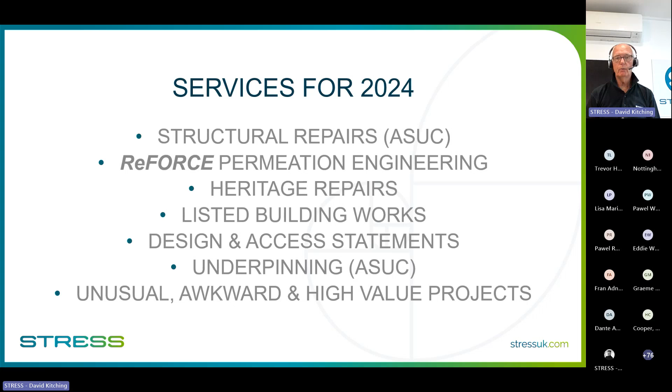Within structural repairs, you've got masonry reinforcement, crack bonding, the cosmetic refurbishment that goes along with that, stone repairs, because obviously dealing with a lot of old listed buildings, we have to do that.

What I would say is that working with listed buildings is really quite specialist, and if you haven't done it before, it's easy to fall foul of the local authority conservation officer, and dealing with them needs to be done carefully. They're very intelligent people, they know exactly what it is that they require, they know what the rules are and the laws. And if you transgress those, someone goes to jail, or certainly there'll be fines. So we can help steer you through that little lot.

So let's crack on, if you pardon the pun. Now, I think everybody can see that that is a pretty standard, quite substantial fracture in a building, and this is a sort of thing that is very common due to subsidence, thermal movement, sometimes certainly impact, as we'll see here. Find out what your cause is, and obviously try and make sure that whatever's causing it is rectified before you then do the structural repair.

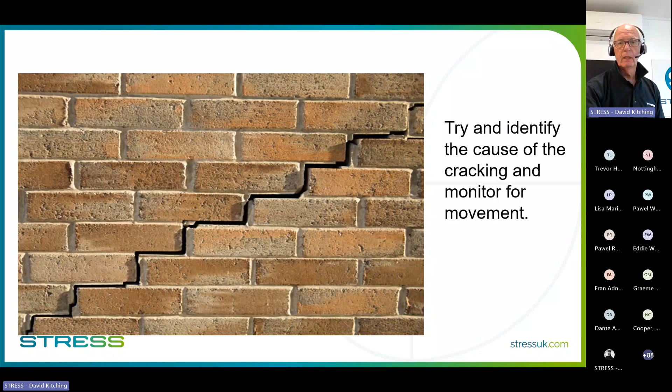So in this case, we can see that the cause of the cracking here was some enthusiastic parking, which, funnily enough, I put up for two reasons. One is that it's quite amusing, I can't believe somebody didn't get hurt, which is obviously sad. But we actually get involved in pulling cars out of buildings, or vehicles out of buildings, more often than you would warrant.

And insurers ask us to do that because they know we can make the building safe to be able to pull the car out, because in that particular instance, you don't know what part of the building is now sitting on the car. So just to pull it out, you'd get progressive collapse potentially.

So we look at the structure overall, put in whatever necessary temporary works are required, which includes quite often masonry reinforcement to spread loads so that actually you can safely extract the car.

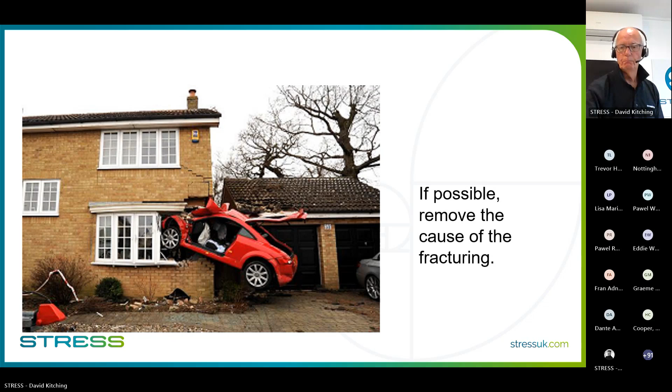Some of the considerations for an effective structural repair: how much disturbance are you going to have to do to this building? Try and keep it to a minimum, because the aesthetics are everything. Because if it looks like it's got an elastoplast on it when you've finished, it's not what you want, is it? If it was your property, you wouldn't want to see all the scars of the repair works. You want to try and match them in, get the color matching going, do as little as is necessary. That's one of the things that's really important here.

Find out what type of repair is going to be appropriate, and obviously then record that. If it's a listed building specifically, you have to record everything you do to that property.

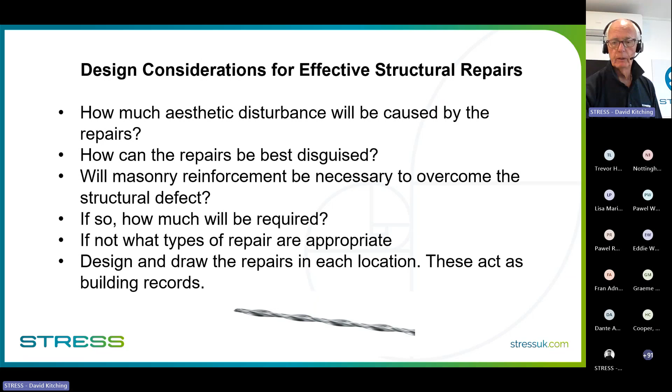So we're going to go on and look at masonry reinforcements. For those of you who don't know, or haven't seen this, I'm sure most people will have done. It's a method of installing reinforcement into masonry to do two things: to structurally rebond it, and to distribute stresses in the future. Quite often buildings are subject to differential movement through thermal effects, through drying out of clays, swellings of clays, all sorts of bits and pieces, or where you've got a building that's been extended and the extension is on a slightly different footing to the main building, then you can potentially get movement between the two. Masonry reinforcement spreads those stresses and usually prevents recurrence of cracking in brickwork.

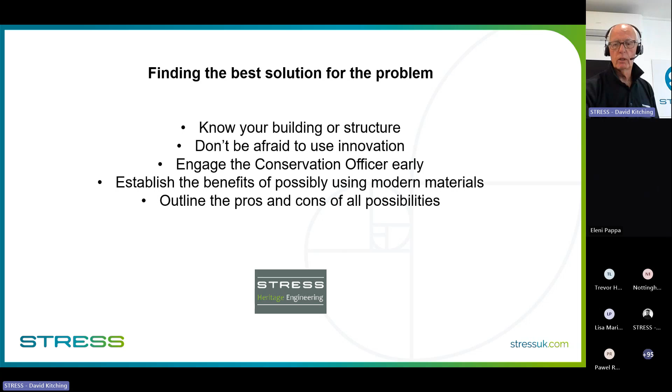So one of the things we're talking about is scarring buildings. Here's something very simple: a little semi-detached house, very typical. There's been settlement of that left-hand flank wall. And the reason was, when we did the site investigation, in fact, those drain pipes never went into a drain. So they've been just draining gently into what is actually, on this particular site, mostly sand and gravel.

So that flank wall has settled with time a little bit, and you get that classic crack between two weak points in the building, which are the windows, obviously. That's fine, no problem at all.

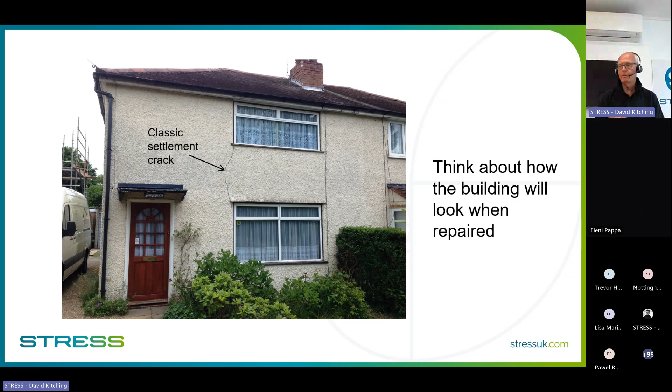Easy. If that was brickwork, you just literally go into the bed joints of the brickwork, make good, resin inject the crack, everything's fine. If you take a Hilti wall chaser to that rough cast render, no matter how carefully you repair that, it will always be visible in some light or other at some angle of the sun.

So you're never going to hide the fact that that has been structurally repaired. So what do you do? Simple, you go inside. Yes, you're going to disturb the decorations inside, but most house owners will thank you for not advertising the fact that their house has been structurally repaired.

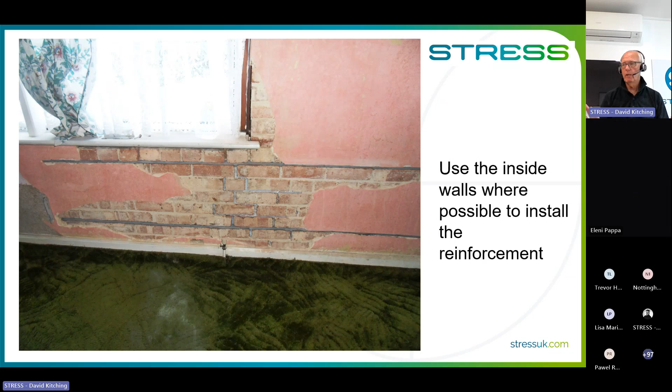So you come inside, you put the HeliBar into the brickwork, you resin inject the crack, as you can see. This was solid brickwork, but it still works for cavity construction in exactly the same way. So you put your heli beam in, then you tie the two inner and outer leaves together with pins, replaster, redecorate. You'll never know that the crack has been repaired and reinforced.

And then what you do when you go outside is don't disturb that rough cast render. So you do some very careful injection work with tiny little 10mm holes along the line of the crack, and then just gently piece in similar sized bits of aggregate, and sponge it in with some cement paste, with a little bit of SBR in it. And when you paint it, it's not invisible, but it's actually quite difficult to see what's there.

So this is the art of structural repair.

So let's go on to listed buildings. This is, or was, an old pub in Haddenham, Buckinghamshire, and it was bought by a client, taken out of use as a pub. He wanted to actually just flip it.

But he took on what probably any of you who deal with listed buildings will know is a bit of a nightmare, that you come across stuff that you never knew was there. So this was something that happened there. All the old barn on the outside was stripped off, and it exposed this gable end of the main pub with the chimney in it.

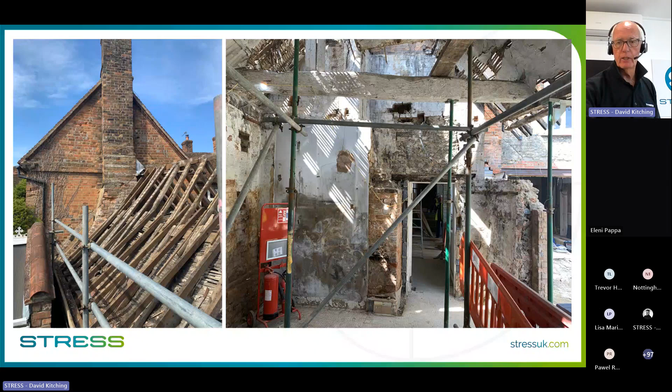And as you will see in a minute, you can see the sort of general state of the place. Not great. When you look up that gable wall, you see holes, cracks in the chimney, probably through chimney fires. Everybody realized at the end of the day that that whole end gable was live.

So we were brought in by the main contractor, who we do quite a lot of work for, and he said, 'Do you think you can save that?' So we looked at it and said, 'Yeah, I think we can. It's going to need a fair amount of masonry reinforcement, but I think we understand what's going wrong, and we can save it,' which was music to the conservation officers' ears.

They almost refused for it to be taken down and rebuilt, which the main contractor wanted to do. The client didn't want to do it because it's going to cost him an awful lot of money. So to try and save this historic brickwork was a good thing.

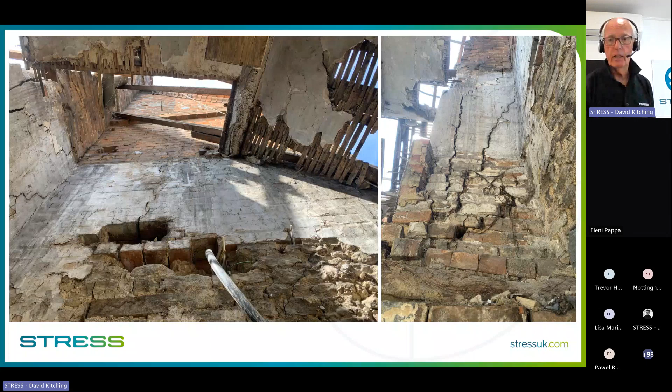So off we went with a scheme. When we started looking around, we took plaster off to see what the substrate was, and as you can see there, that gable wall had at some time in its life been rebuilt, because it's in brick. The rest of the building is in stonework. So that was one thing to take into consideration.

And then we realized when we got into that corner that in fact there was no tie between the gable wall and the flank wall. So another reason why that whole structure was a bit live. So again, one of the things you've got to do is design a bond in there again. So these sorts of things you find out.

You also notice that there's flues in that chimney. You've seen the chimney go up on the outside, so there's bound to be fireplace flues on the inside. Usually with that void there, you get very, very flimsy brickwork, which needs to be stiffened to make that wall work. We'll see that happening in a minute.

Whilst we're there, the main contractor said, 'Look, I've got another problem. I want to increase the size of that opening.' And you can see that opening there with the steel beam over it on the right-hand photo. So we said, yeah, that's absolutely fine.

What we'll do is we'll put some masonry reinforcement in. We'll put a masonry beam into that stonework above that existing opening, and you can reduce the amount of propping you need to do significantly. It makes it an awful lot easier. So in fact, it meant that they could put a new spanning steel in much more easily, threw more load onto the corner, so we underpinned the corner, but generally masonry reinforcement makes things much easier to temporarily prop.

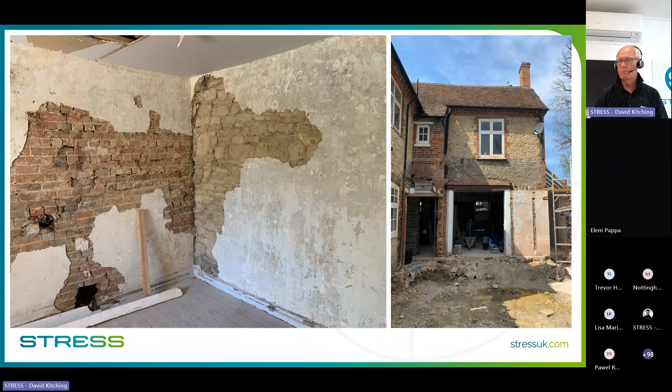So as we said, mark everything down on the drawing. If it's listed, it's going to have to go off for approval, so you need it recorded. Everybody needs to know, including the client, architect, the conservation officer, your guys on site need to know exactly what's going to happen. So you record it, normally on CAD. This was done just on the architect's drawing, as you can see, annotated.

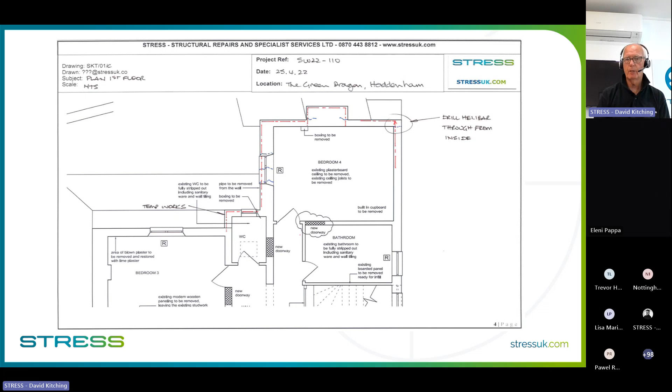One reason I want to show you this is in plan, looking down, top right hand corner there on that gable wall onto the flank wall, there's that discontinuity. Now what we see a lot of in design, and also on some sites, is the repair put forward runs the helibar around the inside of the corners. That doesn't really work, because if the gable wall wanted to move up the page, and you had helibar running around the inside, all it would do is pull the helibar out of the wall sideways. You really want to use the stainless steel bar in tension at all times, so you actually drill through and return the bar on the outside. You can do this almost anywhere. It's a little bit more work, but you get a much more effective repair.

When it comes to the installation, you can see here we've got stonework, fairly regular, but the blocks themselves aren't exactly square like brickwork. They've got slight curves to them, blocks are slightly different sizes, so the bed joint isn't straight. If we ran our chaser straight into that bed joint in a straight line, when you do the repointing, those two lines you see would be straight and all the other pointing would work around the blocks. So you can't do that. You have to hand chase those in, a little bit more work around the blocks, and you'll get a slightly uneven line. When the helibar's put in, as it is there, and repointed, you won't see it.

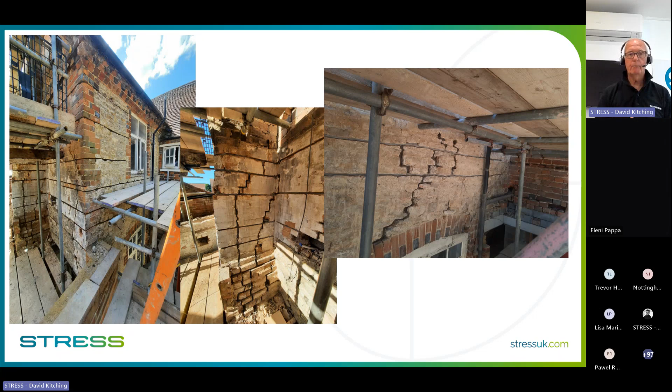It will completely disappear. If you're going into brickwork, you want to follow the bed joint, and the bed joint normally will be straight. Mind you, when you see some of the modern brickwork that goes up, none of it's straight, which is a pet hate of mine. You never see a perp in a straight line. I don't know how people actually get the brickwork passed. Anyway, let's not get onto that.

What I wanted to point out here in that right-hand photo was, if you guys go to site, whether you're familiar with masonry reinforcement or not, you go to site and see it installed - we've seen some horror stories. It's got to be put in right, otherwise there's no point in doing it.

Here you can see just how clean that cut is. We have removed all the mortar. This mortar's normally pretty weak stuff, so if you're going to use it to spread stresses, it's going to have to bond to something. If it's friable, it's not going to distribute any stresses through it. So you remove all the pointing over the depth you need it. Something like this, probably you take out around about 20 to 25 mil of mortar.

You then vacuum it out, you then wash it out, and then you spray a primer in. So then you put the bar in, and then you go in with the polymer modified cementitious grout, and that will bond beautifully to the brickwork. Surround the bar - it's helical bar, so it binds to it incredibly well. When that brickwork tries to move, it will distribute those stresses into the bar and prevent further cracking. So that's why it's really important.

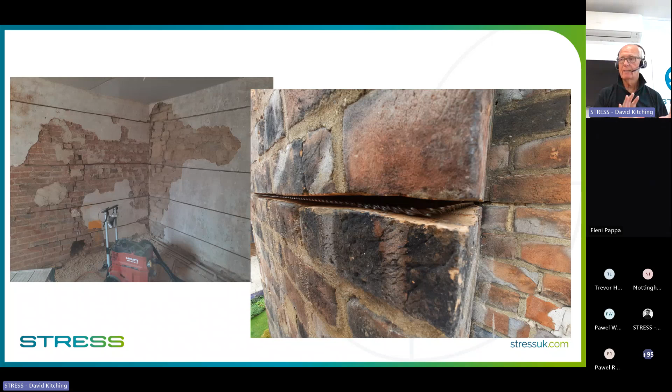Left-hand photo is a photograph of the inside whilst we're actually doing some of the works. This is a mistake here, but I really wanted the guys to put the two bars on the two walls in at different levels, because it looks at the moment like we're going to do exactly what I said not to do, which is run the bar around the corner. Bars on the right hand flank wall, the stone wall, are actually running straight through to the outside and then returned. The bars on the inside of the brickwork on that gable wall are there to stiffen that wall over the chimney openings.

Right, I'm still trying to get a photograph of that job finished, because in fact it was all repointed by somebody else, and I keep meaning to go back and take a photograph of it, and I will do that.

Right, we're going to change tune here a little bit and go on to something right up at the top of the listed building chain of structures, and that's Brighton Royal Pavilion. A good deal of you have probably been there if you've been to Brighton. It's one of those things you probably should do. It's quite an extraordinary monstrosity, really. It's an edifice. It's a wedding cake, really, isn't it? But a fascinating place. And we were asked to come in and solve a problem with the Adelaide balcony.

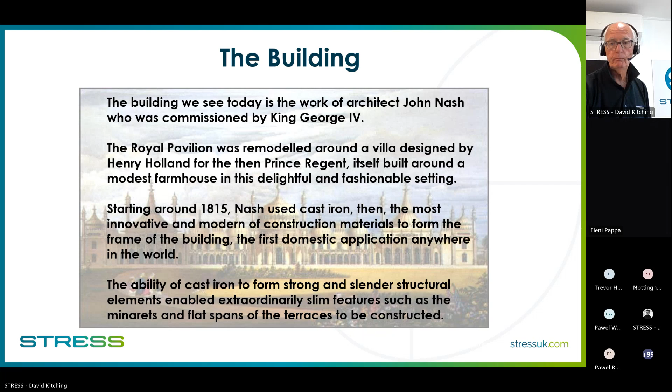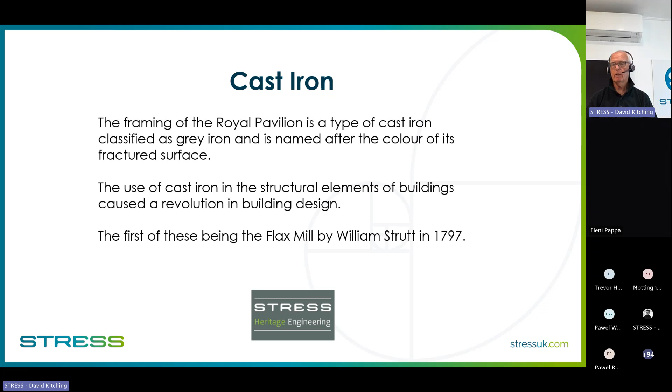He also did this sort of thing in London, which I'm sure you've all been past or into. But it was an engineer called William Strutt, back in the late 1700s, who first used it in a commercial building called the Flax Mill, up in the Peak District. This is still a museum - you can still go and see this building, and you'll see in a minute why he used it. It gave him much bigger openings, a much nicer working environment, and a much stiffer building altogether.

There it is, so that's the Flax Mill. You can go and see that today. Solid floors, jack arches - so brick jack arches that come down into spanning cast iron beams supported with columns. You can see how slender those columns are.

So Nash saw this and thought, wow, if I can turn this into a dwelling, into a palace, it's going to impress the king - which it did.

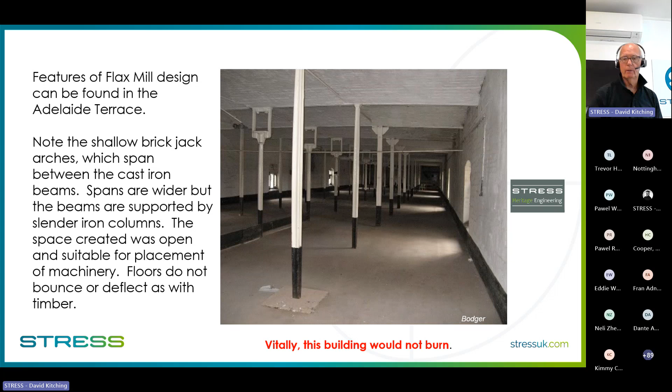However, there's a bit of a problem with cast iron, and that's that it's brittle. I don't know if any of you've taken a sledgehammer to an old cast iron grate or a cast iron manhole lid - you can break them, they shatter. And the problem with them is you don't quite know how strong that cast iron is, because we didn't in those days have the same sort of codes for uniformity of chemical composition as we do today. And when you see how it was cast, you will actually see why there are certain problems in it.

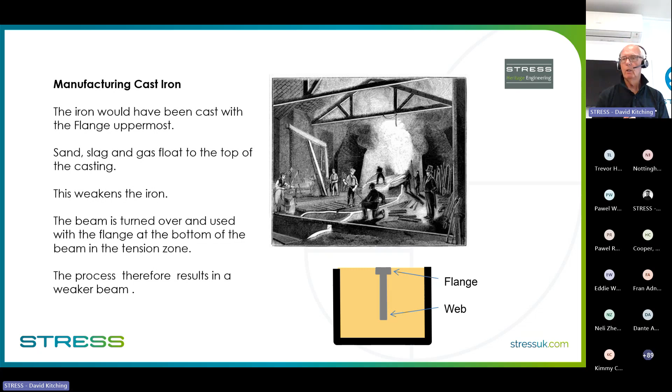So Brighton Royal Pavilion realised they'd got quite a lot of cast iron in the place, and where they'd got big supporting structures like the Adelaide balcony, they had a major problem. So they called in John Holden Associates, who'd been involved in the Bayswater collapses, and said come and have a look at ours. They tested the cast iron in the Adelaide balcony and realised it was actually of fairly poor quality. They did a structural analysis and realised there was a factor of safety of less than 1 on that balcony.

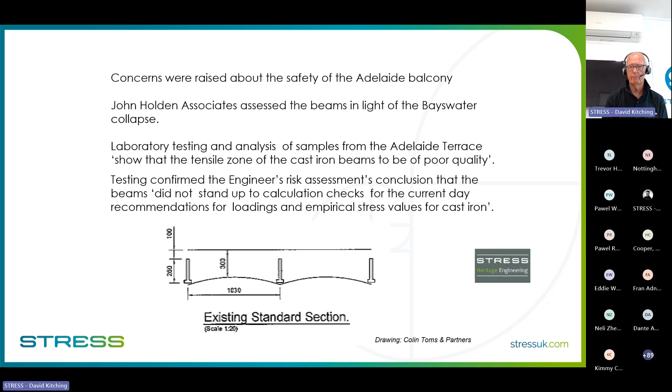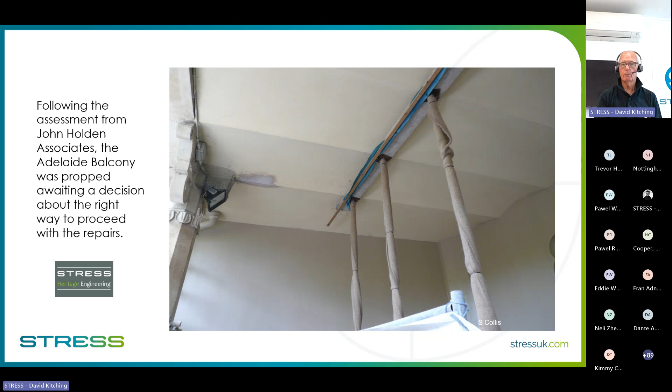And that's when we were called in. So the first thing they did was put some props at midpoint in. You've got a series of jack arches here with cast iron T-beams running from that right-hand wall, where the King's apartments are, out to the line of the stone columns. About a 5.4 metre span.

So we were asked our opinion of what could and couldn't be done. We tend to use all sorts of different types of materials, and Brighton and Hove Borough Council knew us very well from helping them with a number of buildings in the area. We said, well, look, you could do nothing and just shut the cafe down, don't let anybody on it - I'm sure it'll be absolutely all right - which is fairly unacceptable. They need income coming in from the cafe, and from things like weddings, and they use it for governmental get-togethers with foreign dignitaries and things like that.

You could actually install a set of secondary beams. So instead, take the props out, put something in just a little nicer than props, but pretty invasive and pretty unacceptable on a grade 1 gold star listed structure. But you could use carbon fibre.

For those of you who have never seen carbon fibre, that is a piece of carbon fibre plate, 100 mil wide, 1.4 mil thick, stiff as anything. Absolutely amazing stuff, and we use that for strengthening mostly RC, reinforced concrete slabs and beams, but you can use it with steel. So we thought, oh, that'd be quite a neat way, no weight or virtually no weight added.

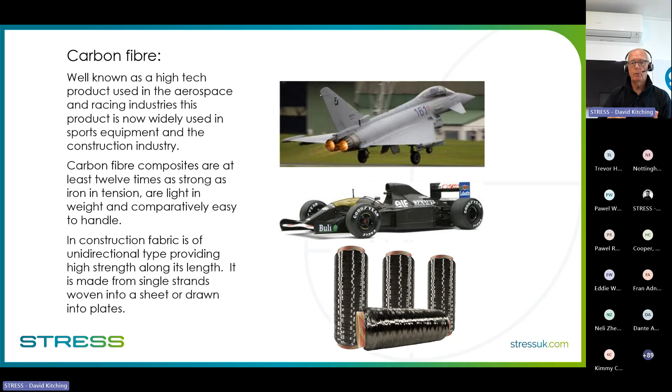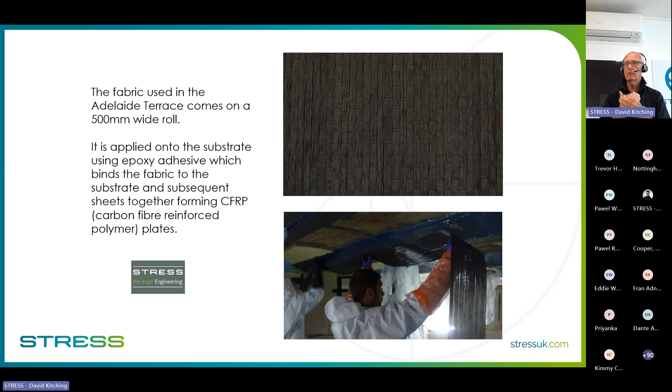Because we're going to make that brickwork span from one end to the other. Things like boats, cars, aircraft are generally made from bidirectional carbon fiber because they get stresses in both directions. When you come to unidirectional sheeting, which is literally like a fabric, you still have to weave it together, otherwise all the tiny little strands of carbon fiber would just fall apart - you'd never be able to handle it. So it is loosely woven, as you can see there. And what we're going to do is bond that to the brickwork.

Not quite as easy as it sounds. We had Colin Toms & Partners do the design - we do a lot of work with these guys on listed buildings. They did a design which had come from another engineer, I can't remember the name off the top of my head, but it was an idea to strengthen that brickwork, as you can see there.

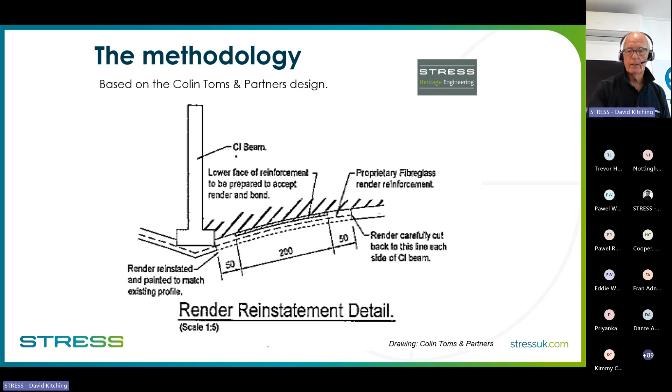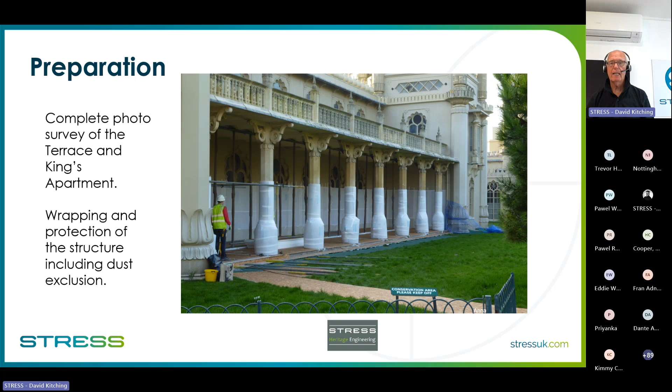So then we had to set about it. For those who've worked on a listed building, protection is kind of everything, and this one was something we'd not come across anything like. Everything had to be fireproof wrapped in case it got knocked, because of the fact there could be a fire, everything had to be in fireproof sheeting. They're paranoid about dust getting into all the antiquities, in the King's apartments or anywhere else, and any type of damage that could occur we had to protect from it.

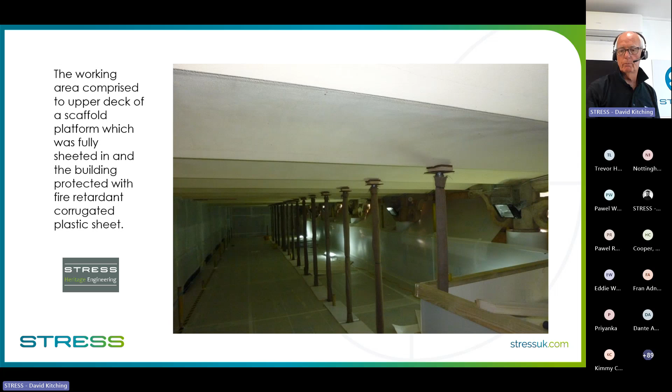We then encased ourselves with sheeting like that, and we had ourselves a rather nice working environment. You can control the temperature in there, and you can do all sorts of bits and pieces to control dust and the whole lot.

Any sort of listed building you work on, you've got to record everything you do. In this particular case, I can't remember off the top of my head, but I think we had something like 14 beams. They all have to be numbered. The brick arches had to be numbered, and then everything you do to each one is recorded, again for posterity, so that everybody knows the record of what's happened to the building as time goes forward.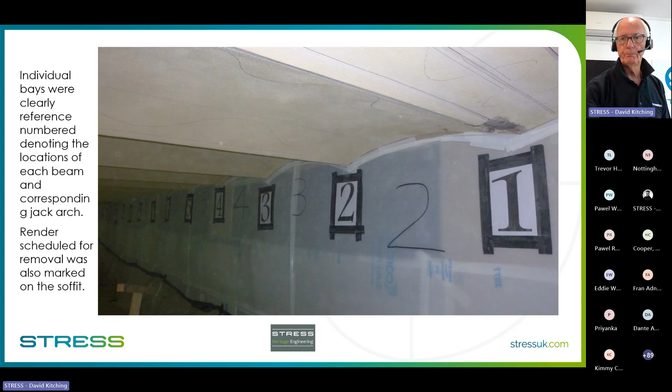You can probably see some lines on the render soffit, and you can see us now using that good old Hilti wall chaser. The beauty of this is we can vary the cut to within probably 0.5 millimeter of where we want it, so we don't damage the brickwork underneath, but we are going through the render, and you get vacuum recovery, so you don't get clouds of dust. It's a great bit of kit, and it's very accurate.

One of the things the conservation officer will insist on is that you remove as little of the existing fabric as possible, no matter whether it's original fabric or not. So we had to literally mark out that 200mm strip, and that's the only bit of render they wanted us to take off.

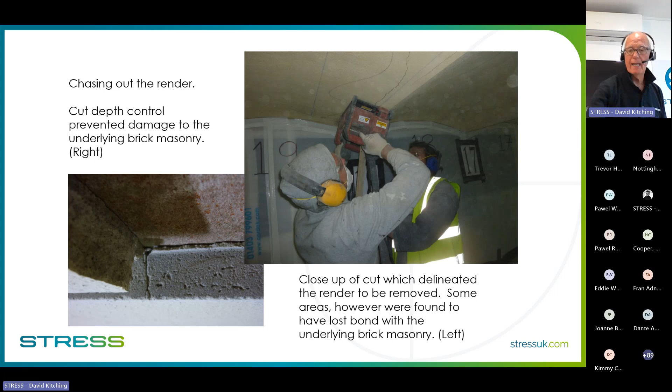Now, what we actually found was that most of it fell off because it hadn't been bonded very well with the jack arches, the brickwork. What we also found when we took it off was - you see the cast iron beam there - but there's actually an infill of stonework. We think because the bricks didn't exactly size the span of the beams, so they've used limestone in there. It's not a problem, doesn't make any difference, but you just find things you weren't expecting to.

We can actually see there, we've left a biscuit - that was part of the render that remained. We had to keep it there, and of course you've then got to match with it, which makes things a little trickier.

So there it is, all the brickwork, all the render removed that we're allowed to take off or fell off. You've then got to clean all that brickwork, because you're going to need to bond your carbon fiber sheet to that brickwork, that's everything. Because as you know, if you put a piece of tape on something to hold things together and it's slightly damp or there's dust on it, tape just falls off. Exactly the same with carbon fiber - if you don't get the bond to the substrate, you might as well have used duct tape. So that's the key to everything.

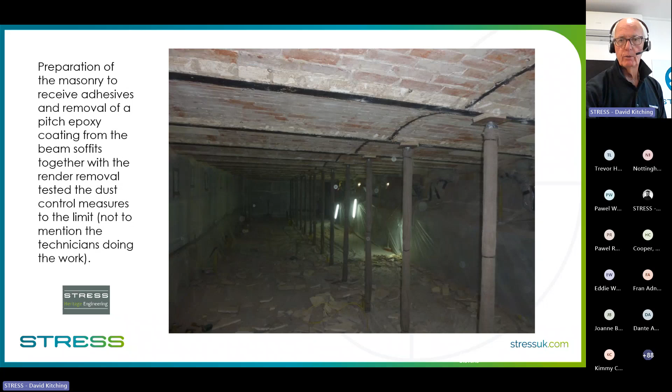So it's got to be cleaned. You don't jet wash this sort of stuff, but it literally has to be vacuumed, wiped down, and then ready. And of course, to get the bond you need between the carbon fiber and the brickwork, you have to test it. You've got to know what's going to happen, because let's say you've got something as stiff and as load bearing as carbon fiber, but the surface of that brickwork is friable - it'll just pull off, it'll never transmit the load. So you need to get a really good idea of what that bond strength is at the surface.

What you do is take these 50mm diameter dollies, which are about 2,000 square millimeters, and bond them to the brickwork, then allow that adhesive to go off, and then pull them off normal to the surface and see what sort of bond strength you've got.

Now, what you really want to see, ideally, is the adhesive pulling part of that brick surface off, or if you're doing it to concrete, part of the concrete, and then you know exactly what that bond strength is going to be. And what we're looking for is a figure of 1.25 newtons per millimeter squared as a bond strength. If you achieve that, then you're going to fully maximize the potential of the carbon fiber.

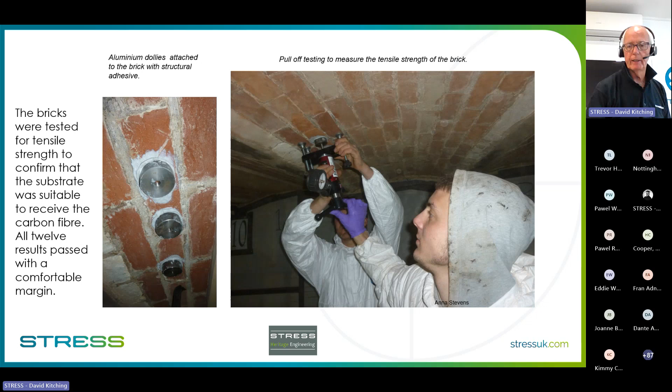That actually is Annie. She is our conservation manager, so she looks after all the jobs we do for listed buildings, and was there getting involved in everything we do. Annie will, if you need design and access statements or any advice on listed building works, Annie is your girl. She will help you.

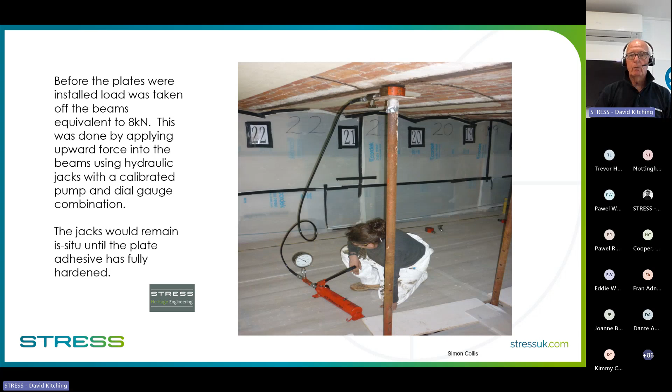But then we came down to the cutting. So everything's prepared, everything's ready to go, and we now need to make these sheets exactly the right size. You can now get carbon fiber sheet in rolls of different widths. In those days, it only came in 500mm wide rolls, and we needed 200, so in fact they were cut. Each one was cut, but very easy, you're running along the lines of it. A good pair of shears will actually cut through carbon fiber in any direction.

As you can see, we've got a lovely sort of laboratory quality working environment. So we've got the brickwork exposed, as you saw. We've cleaned it, but we still prime it. And the reason for that is that any little loose particles here or there get bonded back into the brickwork. And you'll see the next thing is a regulating coat.

Now, you would think brickwork looks pretty all right, we're going to wallpaper it with carbon fiber, it'll be absolutely fine. But actually, when you put a straight edge to that brickwork, you'll see there's 2 or 3 mil here between brick levels, a little bit of mortar pointing sticking out, and in relative terms it's a bit higgledy-piggledy. Carbon fiber, unlike wallpaper, won't drop round little cracks and bond right to it, it will bridge those cracks. And as soon as you bridge anything, you haven't got full bond, and you're not going to mobilize the full 100% of the area of the carbon fiber.

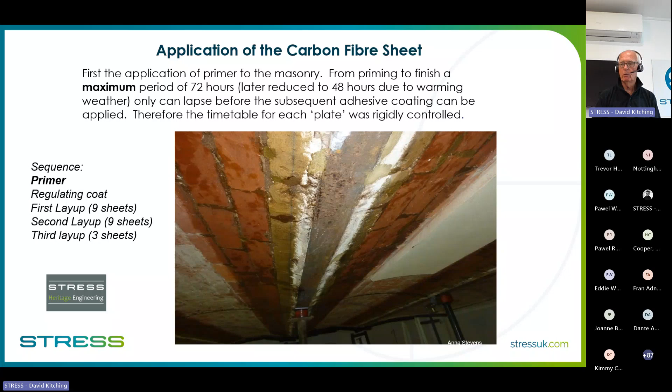So everything has to be smoothed out. So we've got one of our guys here, John. He's worked for us for over 25 years now. He's a master plasterer and screeder, and I think he's the only guy I've ever seen who can handle what is a thixotropic epoxy adhesive or putty, and actually make it go the shape he wants it. And so every one of those had to be in a curve and smooth, so that when you then bond the carbon fiber to it, you get a full 100% intimate bond. The putty, of course, goes into all the little shapes of the brickwork, and you get a full bond on that. So that's what we call a regulating coat.

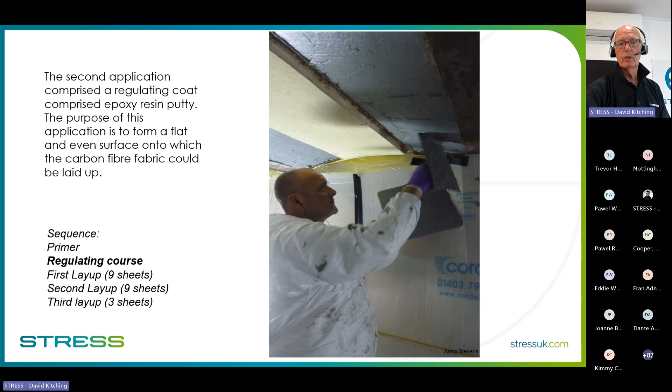And then we can start to apply the carbon fiber sheet. Now you will see here that, in that list, we've got the first layup, which is 9 sheets. Now, I still don't know why, out of 21 total layers of carbon fiber we're going to put up, we didn't do 7, 7, and 7. But for some reason, it was 9, 9, and 3. I've absolutely got no idea why, and I don't know why I didn't ask the question at the time. But you put it up in a series of layers like that because, if you remember, the only layer that's in contact with the brickwork, which is the most important one, is that first layer.

And so if you don't get that bonded correctly, you might as well not bother doing the rest of it. So you want to put them up in a number of layers. Remember, it's only 0.3 of a millimeter thick, this carbon fiber sheet. So there's not a lot of weight there, even with the adhesive on it.

And you do it in a layer of 9. That allows that first layer to cure properly without tending to allow gravity to pull it off. And then you do the next, go down the line, do the next, and then come back and start doing second layup, and the same, and the third layup.

And you can see here we use a roller. So the resin itself, we went for blue because we wanted to see exactly where it went. But in fact, normally it's a kind of a honey color. It's about the consistency of honey, and it rolls on, so it drips down your elbows all over the place, but will fully saturate the sheet. And that's what you want.

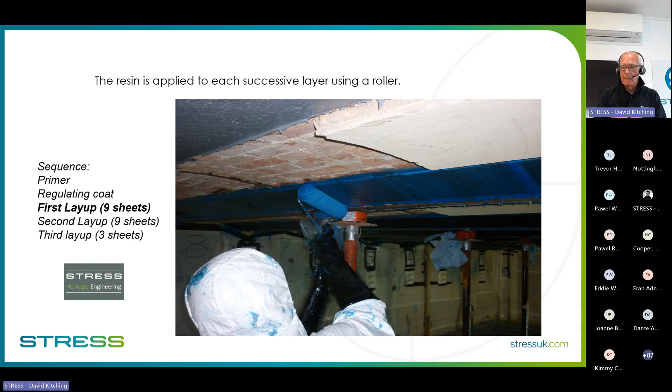You want the carbon fiber, the epoxy resin to go right the way through the sheet and bond all the individual strands together. So you use a roller, and then you use a rubber squeegee, and that will press the carbon fiber sheet up to the one above it, and make sure that you pull all the resin right the way through, ready for the next sheet, until you've got it finished.

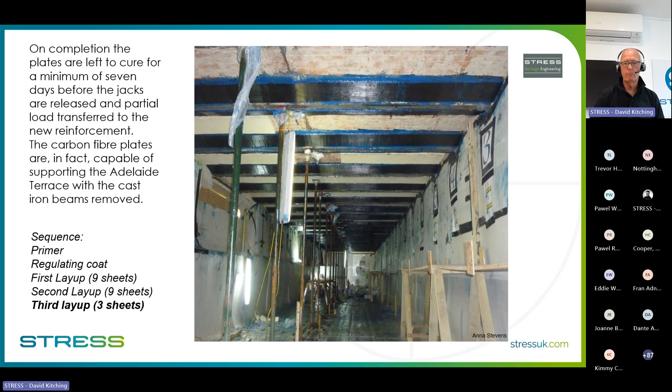And then you've got to put the render back. For those of you who don't know or don't work on listed buildings, if you're going to match a material, you have to have it analyzed. So if it's a mortar that goes in between stonework or brickwork, take a sample, it goes down to the lime center or equivalent place. They analyze it and they come back with a mix design, so that you know that you're going to put back like for like. So that's what we did here.

Guess what? It was sand and cement. So that render that had been put on that, we don't know when, I think about 30 years ago, was actually sand and cement. It wouldn't have been that in the first place. It would have been lime render, but for some reason they'd managed to get sand and cement on it.

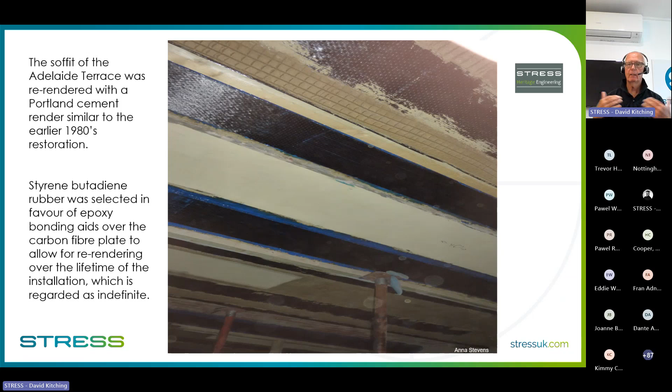And so we had to match that. We were, however, allowed to put in some SBR, which is a sort of an additive that makes the sand cement more sticky, and slightly more pliable, so it bonds better and will last much longer. So there's a scratch coat going up, and there's the completed items. That's all done by hand.

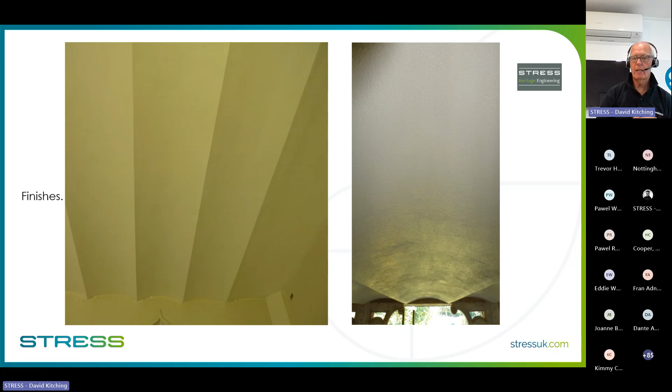John was the master plasterer, you saw him earlier on, and you end up with basically something that you can't tell that carbon fibre has been used.

So there you are. So you will now know if you go to Brighton Pavilion that in fact that Adelaide balcony is strengthened with carbon fibre sheet. That now has a factor of safety in excess of 2.

So if you go to a wedding up there, you can quite happily jump around and dance on that balcony. Fully completed, very happy client.

Heritage works we do all over the country. And I'm going to take you to the Isle of Wight now. This is a beautiful monastery, basically. Benedictine monks built this at the turn of the century, last century.

Came across from France with cases full of francs, or whatever they had at the time, and built. Who the architect was, I don't know. I've never found out. But superb artistry in brickwork.

It's beautiful, and has been for most of its life so far, until they started getting cracking in the arches, which is worrying in itself. But then they started getting masonry falling out. And they use that in daily prayer. They use that whole aisle in daily prayer.

And it's used to get revenue in with members of the public paying tickets to come and have a look at it. And if you go down, it's well worth going down there. It's called Quarr Abbey, and it's Quarr on the Isle of Wight. Fantastic. 12 meters to the pinnacle there.

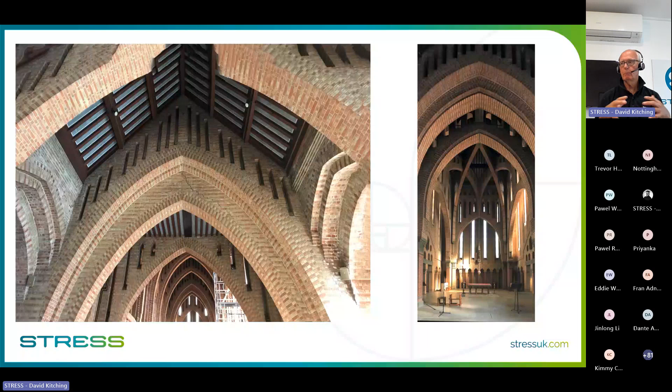So we designed a series of plates, masonry reinforcement, pins, that sort of thing to go into those arches. Fascinating project. We couldn't fully scaffold it as we wanted to. We had to use towers because we had to work around the prayer times and allow people in and out. But we're working on 12-meter high towers, which isn't that efficient, but you work with what you've got. Now the cracks themselves went through most arches, some more severe than others, as you can see there, but even in the crypt.

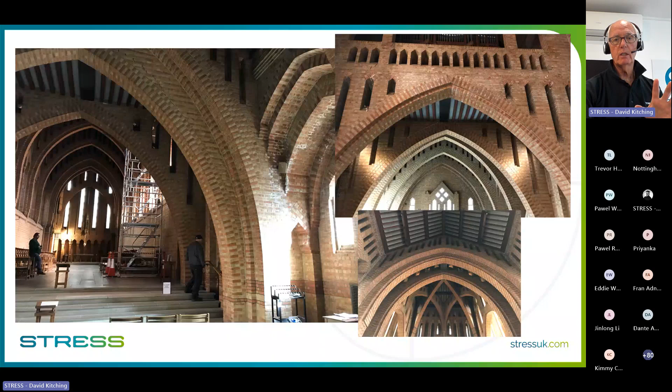So these are much smaller arches under the floor. You can see the floor up there, the concrete floor of the aisle. And we found areas of brickwork that just could not be mended, pinned and reinforced. We had to take that apart, rebuild it, incorporating plates and masonry reinforcement, again to try and help it spread the load as the building moved.

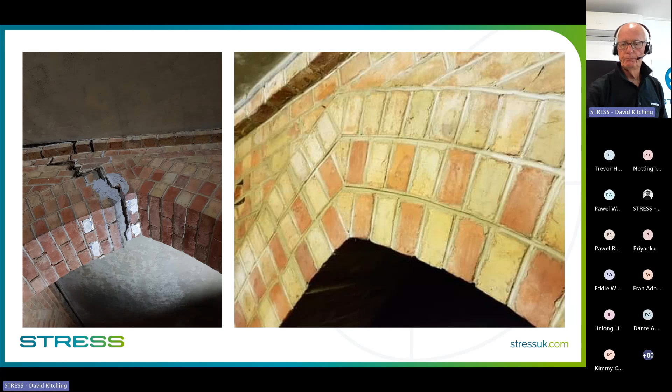And that's it. So to date, this was about 5 years ago, I think. We believe all is good, although they've got some major foundation issues which are being looked into. But great project, really fascinating. We love unusual ones, and we love being able to scratch our heads and solve problems. And here's one.

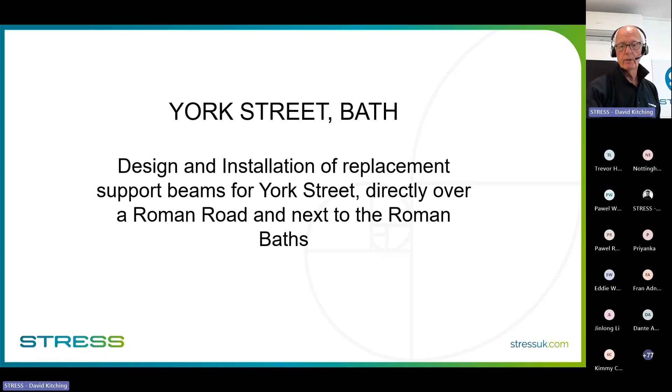You'll have probably been to Bath as well. Many people. It's a fascinating city, a Roman city, and we were asked by BANES, as they're called, Bath and North East Somerset Council, to help them with a problem they had with York Street. York Street is directly over an old Roman road or pavement and is right next to the Roman baths.

Because what the Victorians did was raise the level of the roads in a lot of Bath to come up above the old Roman road, to provide equality in levels for various parts of it for the main shopping street. And so in fact, you can see York Street there going under the arch is actually elevated off the Roman road and is supported on composite beams spanning from the Roman baths on one side over to under that pavement, where there's a new wall and a series of columns set in the middle.

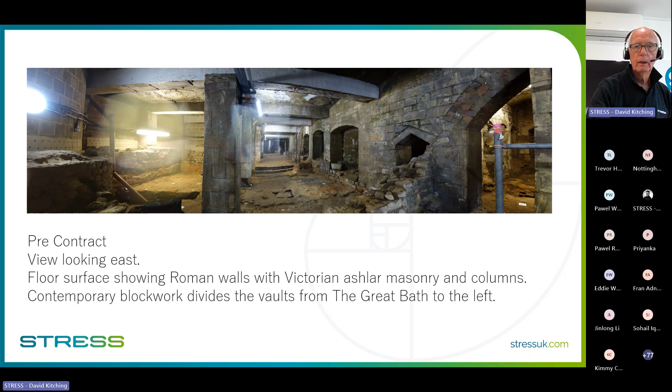And one of the restrictions that we had was making no noise or disturbance, because you've got fee-paying customers coming into the Roman baths. So we had to be quiet, and we couldn't make any dust.

So how are we going to swap out a significant size beam from under the road, on top of Roman pavement, in an environment like that? I think we came to the fairly quick conclusion that you could not remove those beams. You had to enhance them in some way.

The reason there's a problem is there's two steel beams side by side, butting each other, surrounded in concrete. The Victorians had a great idea encasing them in concrete, but they didn't fill the void in between. So at the ends where they're supported, they're exposed to the atmosphere, moisture, temperature and acidity that comes with being close to hot springs, hence the corrosion. So they knew the bearing ends of these beams were suspect.

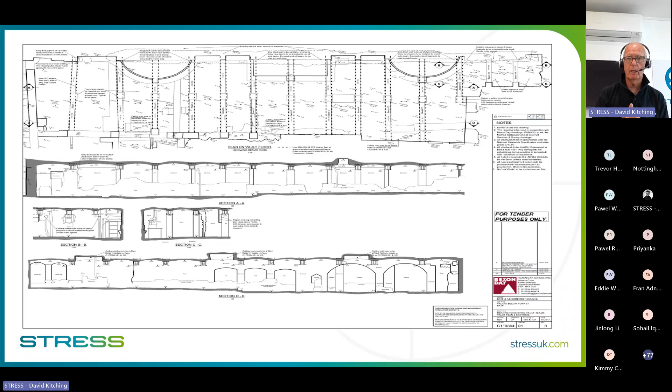They closed York Street until something could be done about it, and called us in. We had to look at the practical aspects of how we were going to enhance those beams. This is what we had to work around: old Roman ruins, walls made of bits of old abbey.

But we persuaded the conservation officer and archaeologists that we knew what we were doing, and we could put up a proper working platform. You can see it there. You can also see that the Victorians used composite beams and concrete jack arches to support York Street.

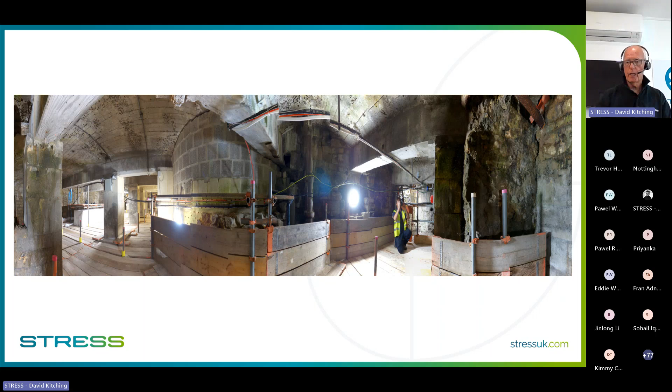We found, after investigating, that the concrete jack arches were fine, they weren't suffering in any way. So there's our working environment. Not only did we have all the Roman artifacts, we had cables, pipes, electricity, gas, and drainage pipes all running through there that we had to work around.

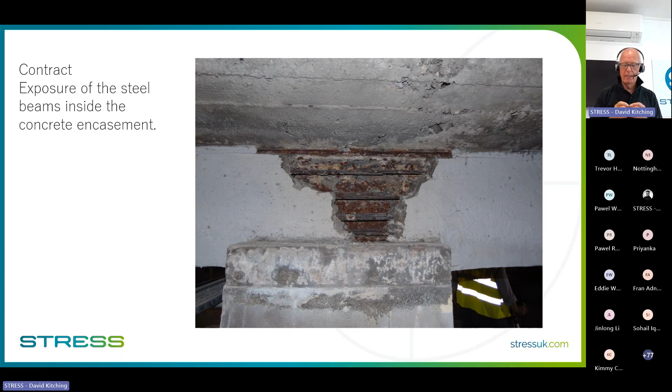So here's the solution, and the reason we went for this was that we could manhandle sections of C-beam, whereas we couldn't pull in full length replacement I-beams or anything like that. You can imagine the noise of busting out that composite old beam. So the idea was we would clamp a new section either side, bolt it through, and that would do the full job of the beams should there be any failure. That's what we came at. It was the only practical way of doing it.

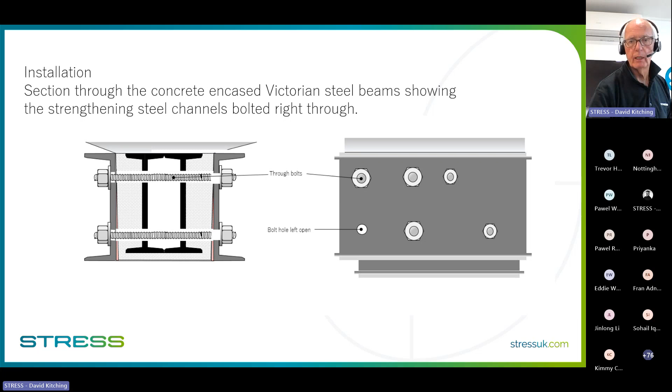But as you can see, it meant drilling an awful lot of holes through the existing cast iron or composite beam. Each beam, because of the weight and the access restrictions of getting under York Street, you could only do a third of the length of these beams at a time. So there was something like 14 odd meters - that was the two of them - about 7.5 meters long in total, and we cut that down into roughly a third.

But each composite beam was a different length and slightly different dimensions, so we had to cater for all that as well. We had templates made for each individual beam so we could mark and drill them in exactly the right place, and a duplicate set of templates went to the fabricator so they could make the steel beams fully galvanized. The holes had to be in the right place so the bolt sockets were galvanized too, to limit corrosion.

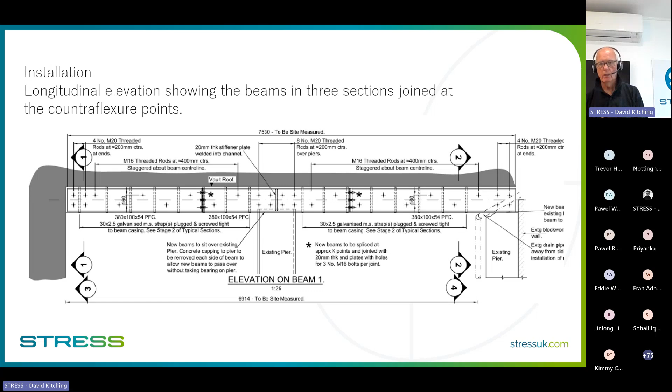So then we marked them out and off went the diamond drillers. These diamond drillers had never had this before - very experienced, but drilling through concrete, steel, void, steel, and then concrete on the other side. They had to be millimeter accurate because our bolt fixings were going to have to go through and pull this together. Great set of guys - 1,500 holes in total, all in exactly the right place.

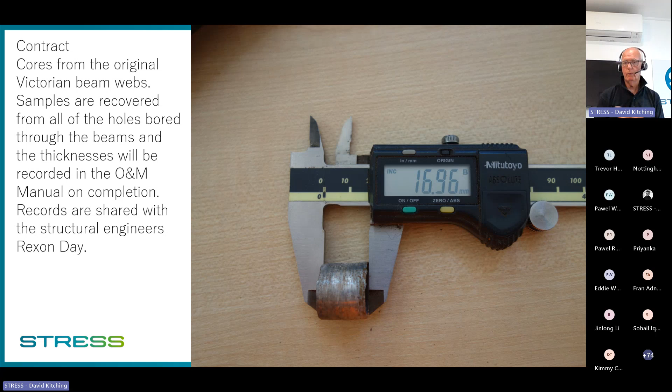We took all the samples out from the coring, and as you can see, that steel's still pretty good, with just a tiny bit of rusting on the outside. So in general, those beams were pretty good - we just couldn't rely on the ends. What we did find was that when the Victorians encapsulated those beams, they didn't care too much what the outside looked like - it didn't have to be specifically vertical. So the concrete itself was all over the place.

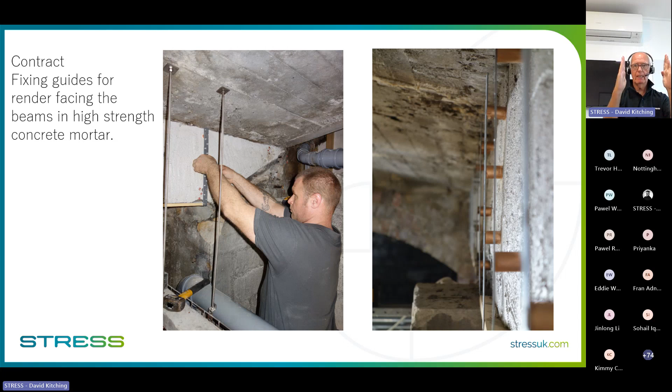We needed it even, because we were going to have to sandwich our C-sections right onto the beam and get them normal to the steel. So we put up guides and then rendered it. We had to monitor vibration and all the bits and pieces. Here's our guides, and they're actually rendering using 40 Newton high build repair concrete.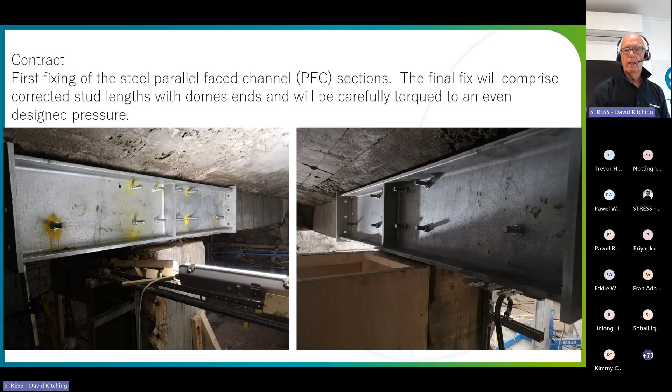All sections went down, lifted into place with these nice little lightweight scissor lifts that we had down there, bolted through. Then remembering that we've got a void between the old Victorian steels, which we said should be grouted up, again to try and prevent ongoing corrosion. So in fact, we built in injection holes into the beams as we went, and then created a flow of grout through to grout up that annulus.

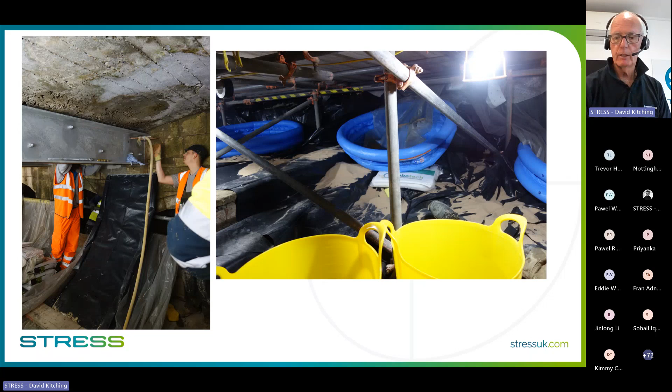Archaeologists were paranoid about spilling any grout onto the Roman pavement, so polythene, kids' paddling pools, buckets - you name it, we did it. And here we are with the grouting.

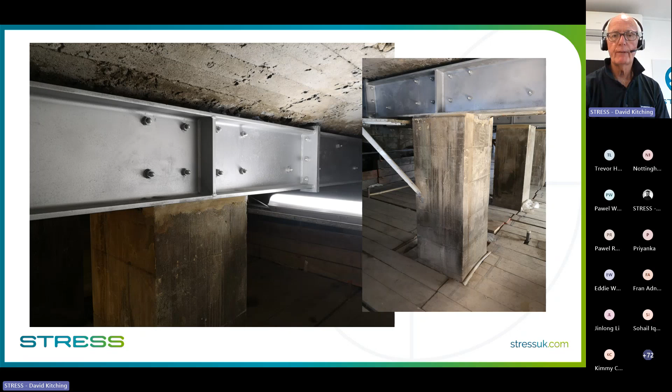And that's it, finished with all the dry packing between the beams and the tops of the columns and the jack arches. If you go down there today, which you can, it's been turned into part of the museum, so you can see all the Roman artifacts in there. I think schools go down doing little projects, and in fact there's an archaeological pit where you can go and scratch around in the sand and uncover bits of obviously false Roman ruins, or Roman artifacts, but it's quite an exciting thing for the kids, and well worth doing. A great project, and literally having to think laterally about how we were going to do this.

They didn't lose a single day of the museum - people coming in, obviously paying good money to keep the museum going.

Right, so we're going to finish with something completely different. It's an arch, and it's quite an interesting arch. We were brought in by insurers - we do a lot of work for insurers, everything from subsidence to fire and damage and flood and all sorts of bits and pieces. They knew we dealt with arches and they had a problem.

This is a culvert, and it's in a place up in the northwest of the country called Ramsbottom. It flows from a stream in the garden, under the road and through, and on down a hill in another part of a culvert. It's pretty old.

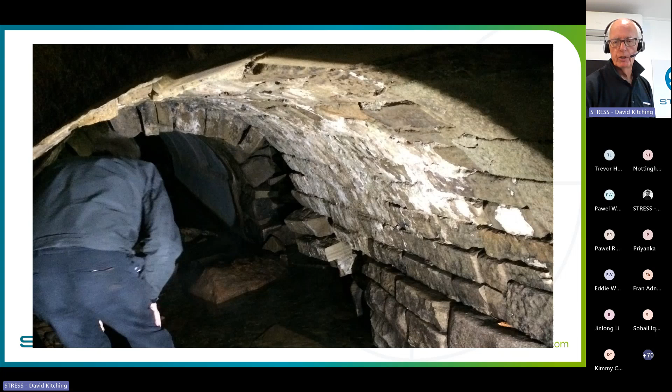So they came to us and said, do you think you can figure another way of doing it? We looked at it very carefully, my colleague Simon and I, and said yeah, I think we can come up with a safe method of work. So we put that scheme together. It went to a temporary works engineer, independent, for checking, and we got the go-ahead for the budget - which didn't please the client, because he fancied having his house rebuilt.

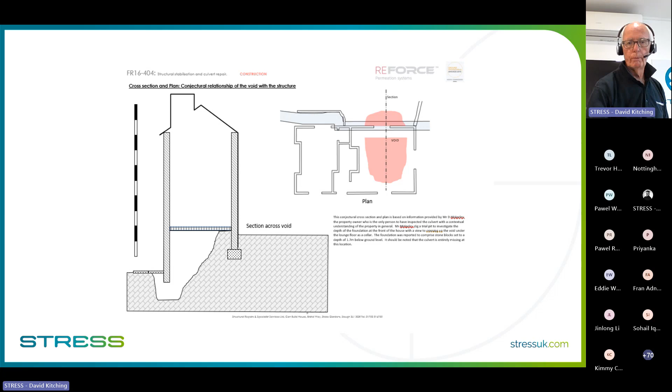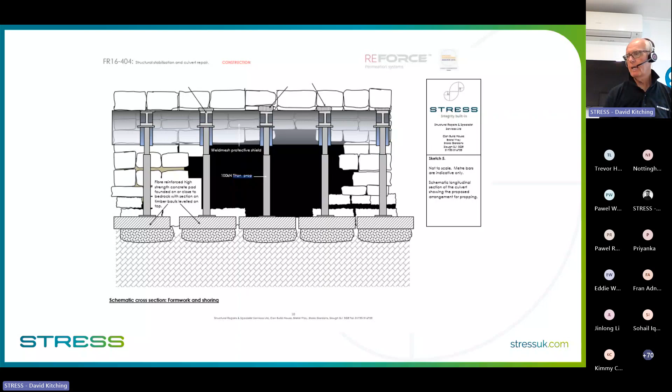But that gives you an idea of the sort of void that was under that back flank wall, all being washed out through scour. So we came up with a safe system of work - basically rapid-set concrete bags on the eroded bed of the culvert, onto which you can then put props and laggings on top to spread the load. We put one every meter, one a day, and we could work our way in, securing the soffit. There we see it.

We also tied the front and the back of the house together, because the back of the house is hanging in the air and we need it. If there's any movement, we need as much tying as possible, so we tied it through. We also carried out dynamic monitoring, so that should there be any movement at any time, the alarm would go off and we could make sure the guys get out safely.

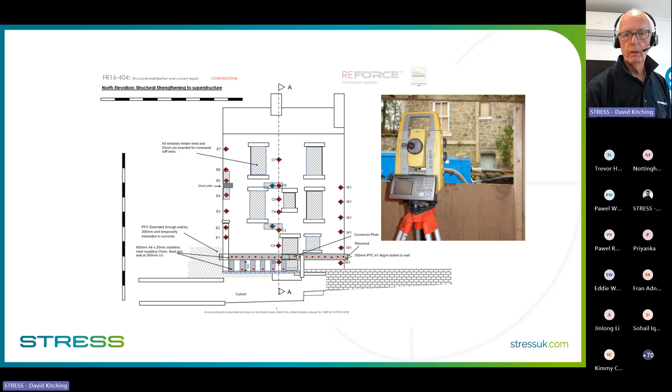What we actually did was to ensure that back wall didn't do a sudden drop, because that's sitting right over the crown of the culvert, but the culvert dog legs in under that part of the building. So we could take that beam from the road back to solid land and create a beam into which we bonded the side wall of the house to try and limit any big failure. If one bit of the culvert goes, hopefully the whole wall won't go, because we've spanned it and tied it through.

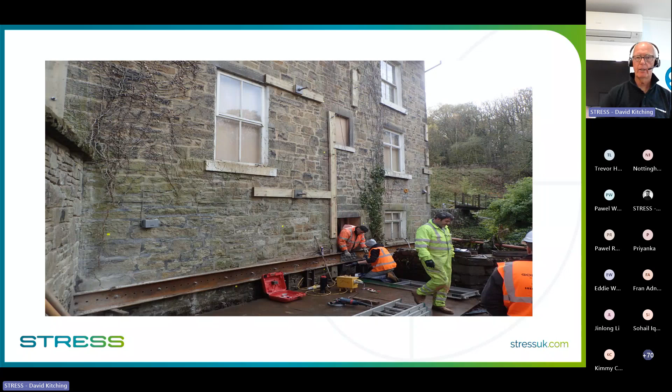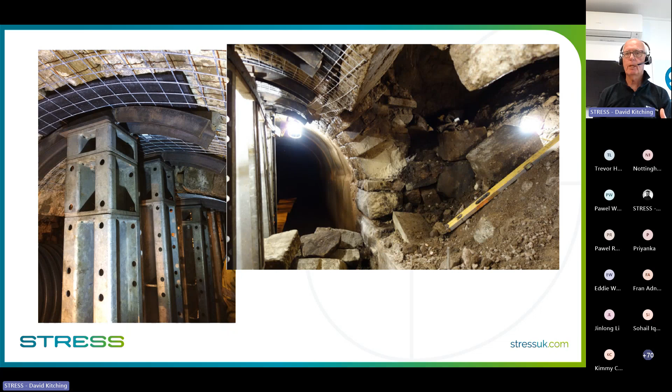Here we are, we're under there, starting to rebuild, and the problem is it's an arch. It's taking load, you can't just place bricks in because there's no compression - you need to create compression into it. You can see there on the left, to do that, you pop the stones up, drive timber wedges in, mortar it, and then point it. You can see we've also used bits of Helibar to again bridge and tie things together.

Scour had been the problem here - some of the huge floods we'd had washed away the abutments, and down came various parts of the wall. So we put those back in high strength concrete to limit scour in the future.

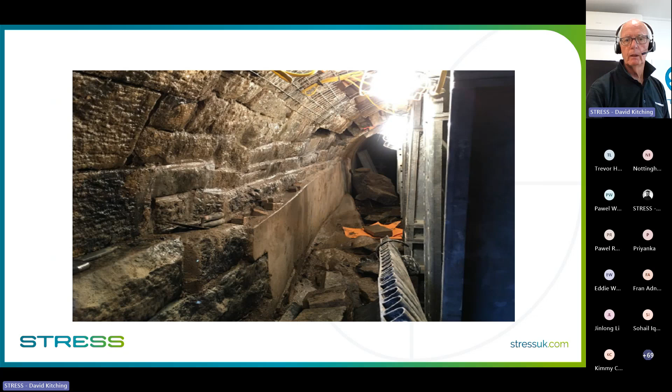Very cramped indeed, as you can see, trying to work in there with that stonework. And that's it finished - I think we charged them, and this is probably 5 years ago, about £250,000 to do that. We couldn't divert the stream, we had to work with that, so it was semi-pumped to keep the volumes low, and we worked in a very tight environment.

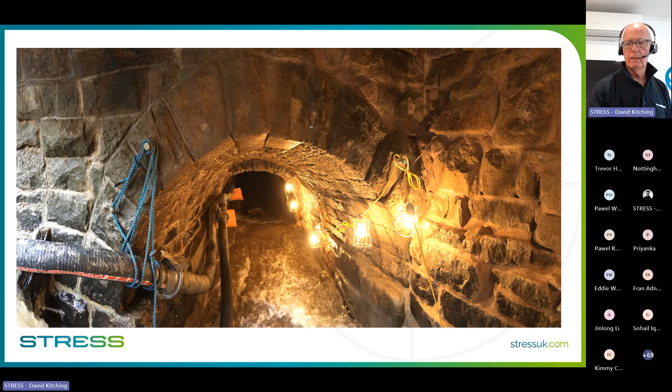These are the practical things we absolutely love - thinking out of the box, trying to get a solution for the client. So I think that's the end. I hope I haven't rabbited on too long. If we've got any questions, Matt, very, very happy to try and answer those.